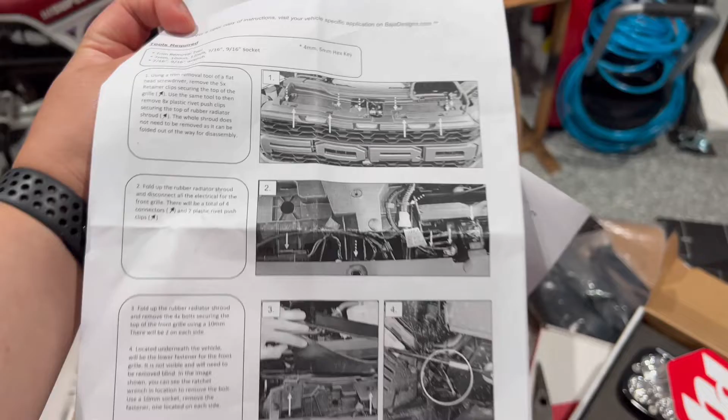Also comes with the brackets that's going to go behind the grill. Should be pretty easy. I did this on my 2020 Raptor, but it was an S8 30-inch light bar behind the grill. So, aside from the paper instructions, which we all kind of never read, right, I am going to have to actually read through this and make sure I'm doing everything correctly.

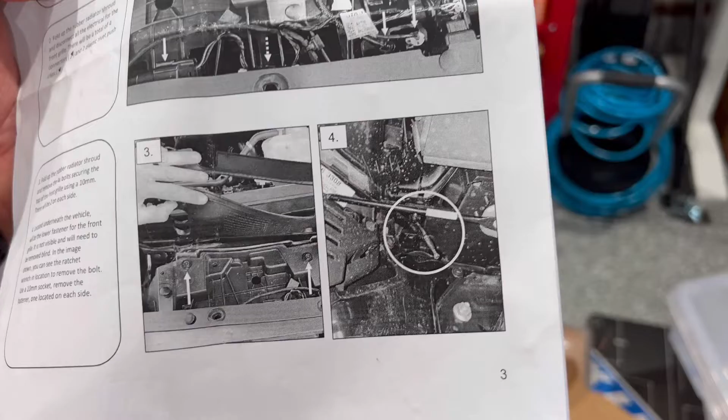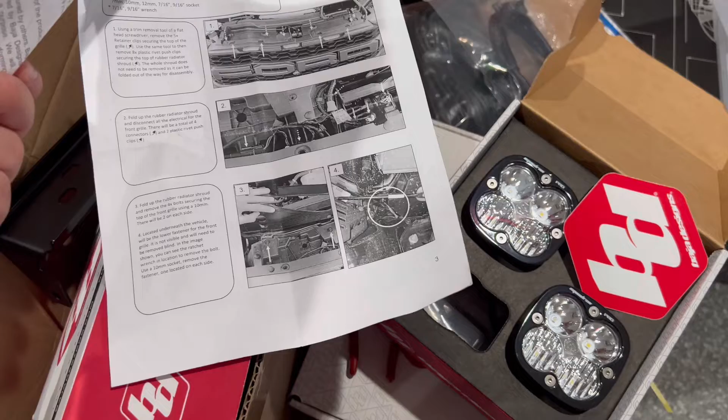As of right now, there is a portion that I couldn't find at all. It's right there, number 4. They're saying there's a bolt that you have to remove blindly, 10 millimeter. I couldn't find it. I put my fingers in there, couldn't figure it out. So I'm gonna try to just go for it and see if I can get the grill off without removing that bolt. Honestly, I don't know if this is maybe a 2021 model. I have a 2022. Maybe they changed it slightly, but I couldn't find that bolt.

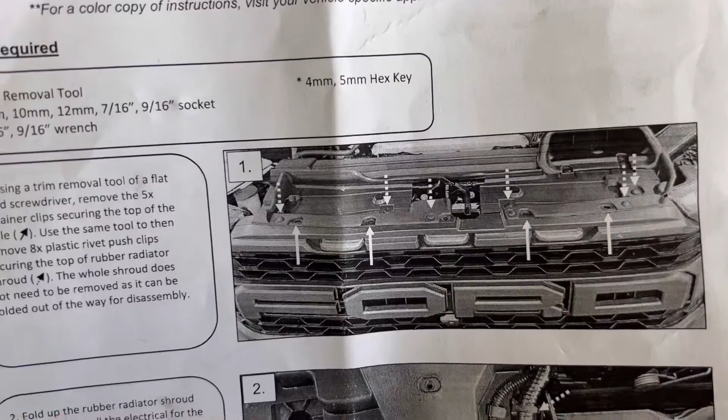But I'll get to it when we get to that portion of the install. So yeah, hopefully it goes down smoothly. These bolts, I'm going to be using this plastic pry tool to get rid of all those clips.

Oh, that one's lost forever.

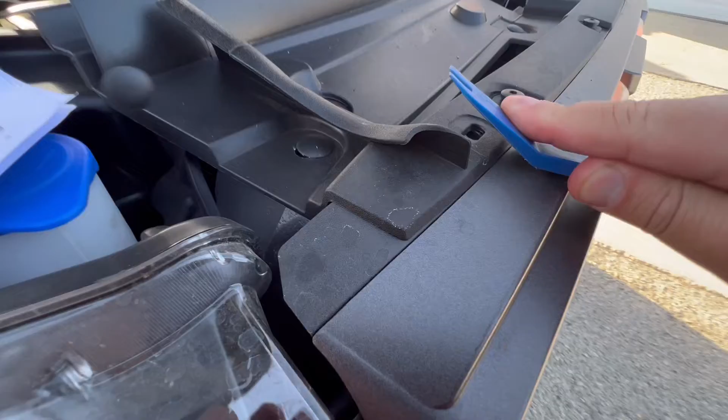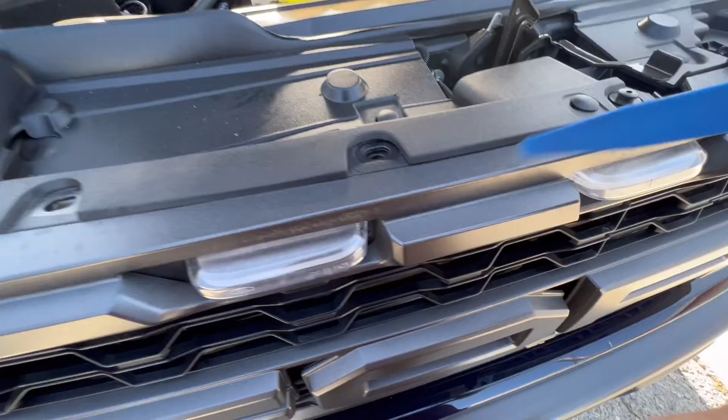So we'll count them: 1, 2, 3, 4, 5, 6, 7, 8, 9, 10, 11, 12, 13, 14, 15, 16.

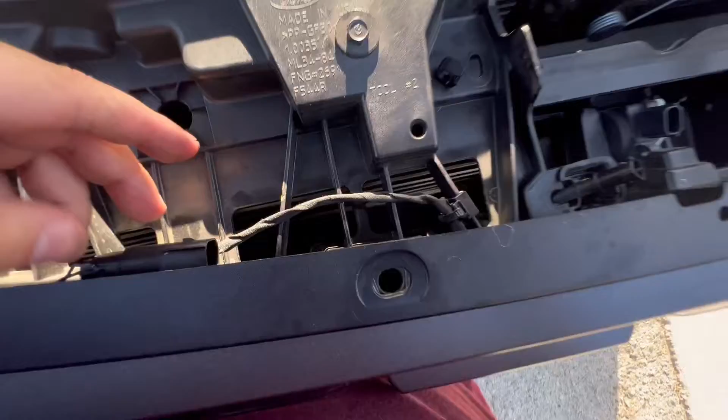All right, so step 2, disconnect electrical for front grill. There will be a total of 4 connectors and 2 plastic rivets. So we got 1, 2, 3, 4. And then disconnect this side.

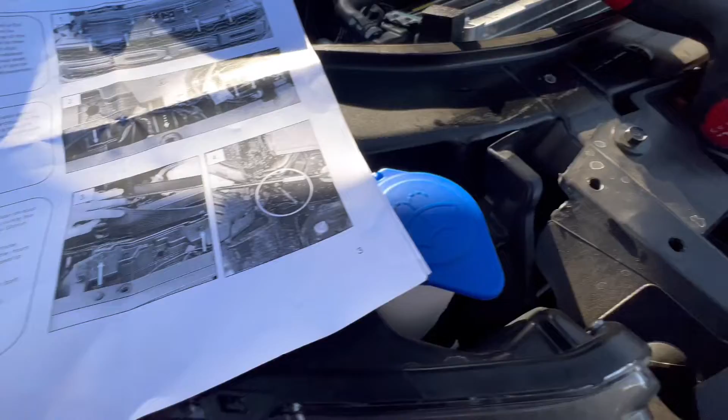All right, so step 3, remove 4 10-millimeter bolts. 1, 2, 3, 4.

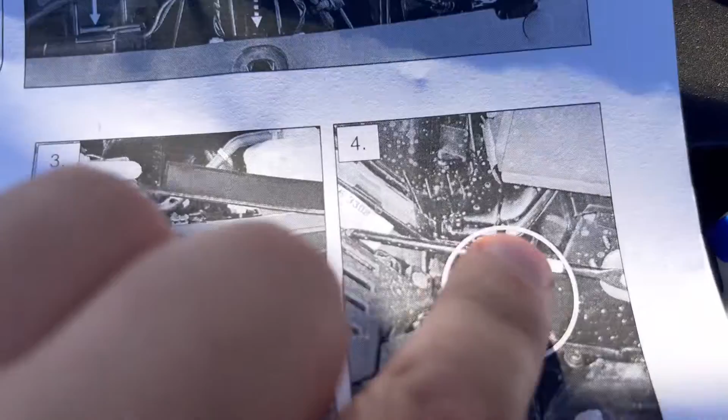All right, so step 4, I could not find these 2 bolts. So I don't know, I'm just gonna move on past step 4. Keep going.

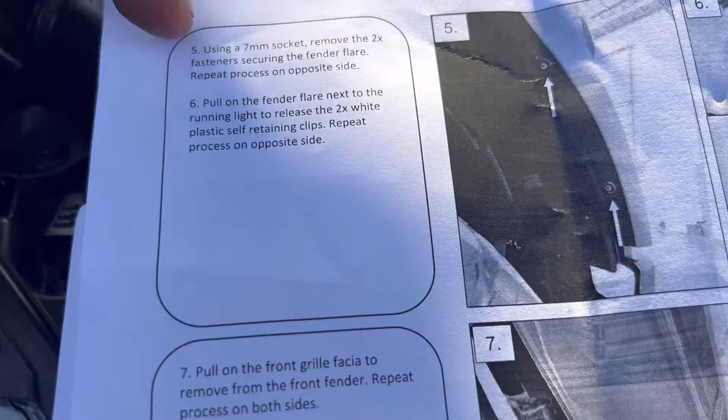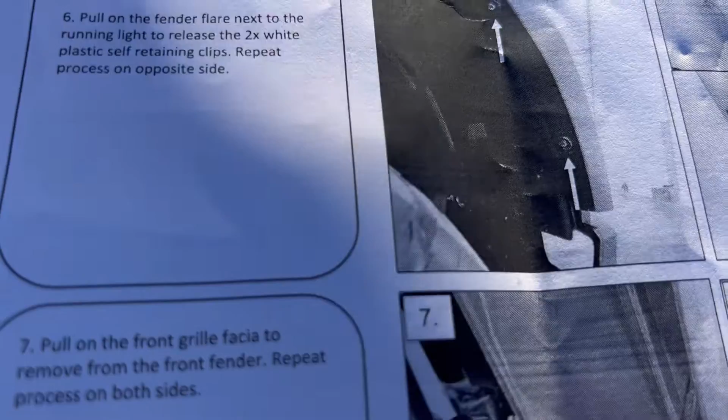So step 5, 7 millimeter, 2 screws on each side, 1, 2. And then we're gonna pull on the fender flare next to the running light to release the 2 white plastic self-retaining clips. Repeat process on the opposite side. So we got 1, 2, not sure how you can see that. 1, 2.

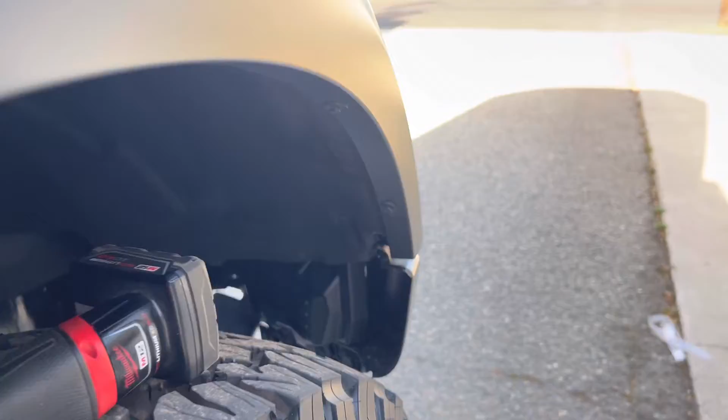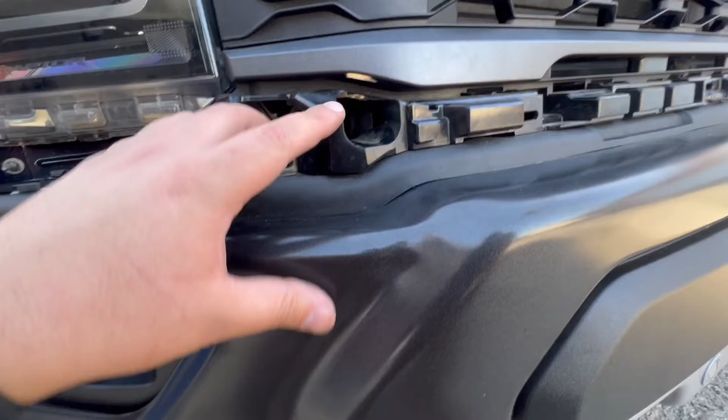Alright, so once you pull this open, you're gonna pull this side. Oh, it's gonna be another 2-hand job. So the instructions didn't mention this, but there's 2 screws, 8 millimeter, one here and one right there that you have to take out in order to take the grill out.

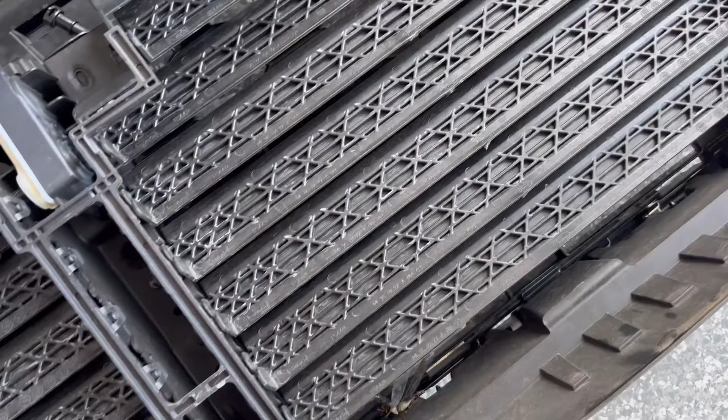All right, so this is another scary process because you're removing 4 of these shutters, but it's pretty easy. You just kind of bend this out of the way.

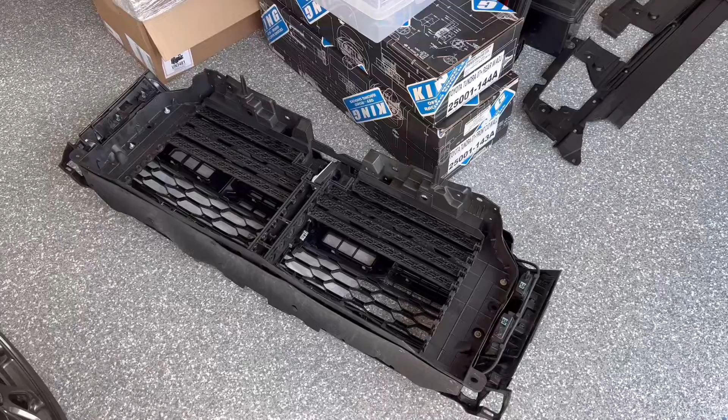All right, so got a bunch of hardware left over. I think they give you extras because all the brackets are on.

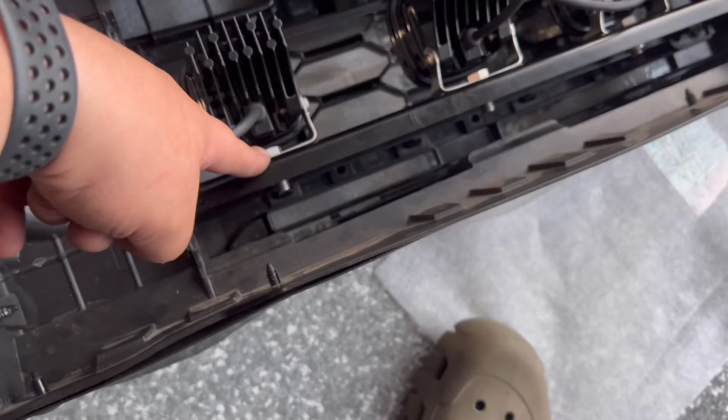This is pretty easy. I mean, it's just throwing the bracket on, and then after I threw the bracket on, I put the lights on, and then after I put the lights on, I brought the bracket over to this, and I put them on these holes here. So you go on the first, on the second and third hole, you remove 4, so 1, 2, 3, 4, you put it on the second and third. Do the same on the other side.

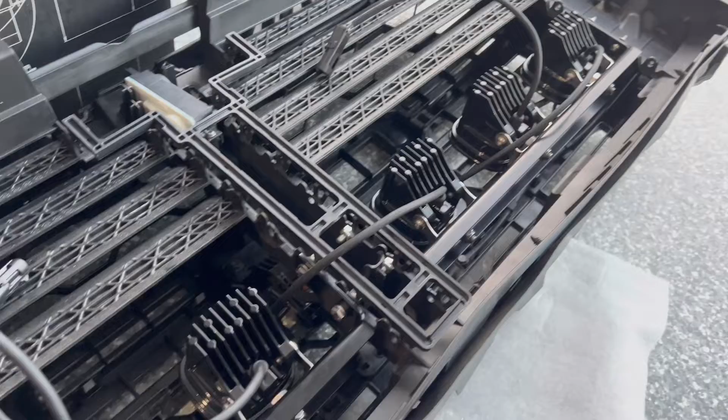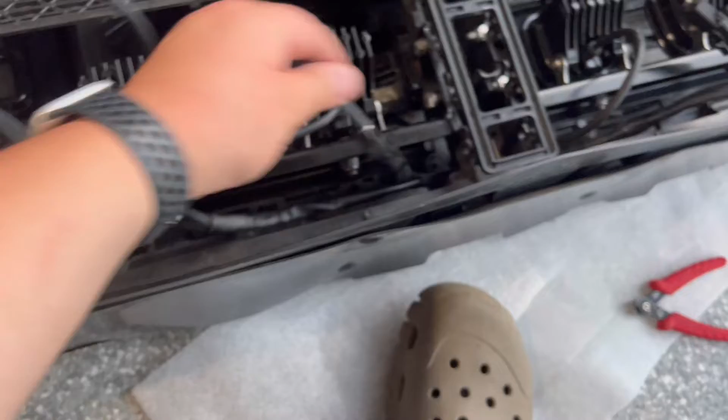And so next, we're gonna throw this harness on, connect all these together. All right, so we got 1, 2, 3. Went underneath, came back out. 4, 5, 6, and the back lead. Right, that's the relay. You got your power, ground.

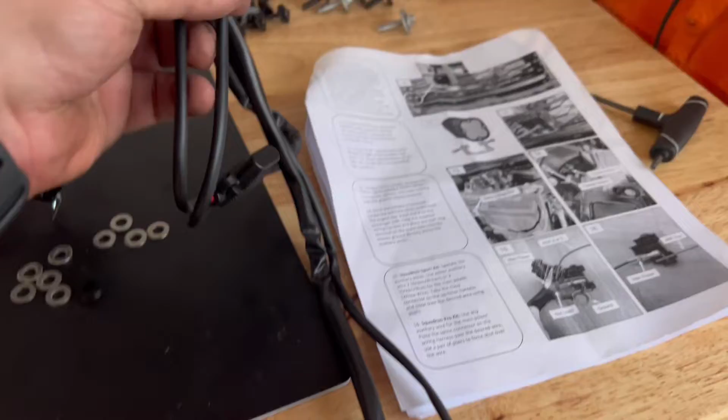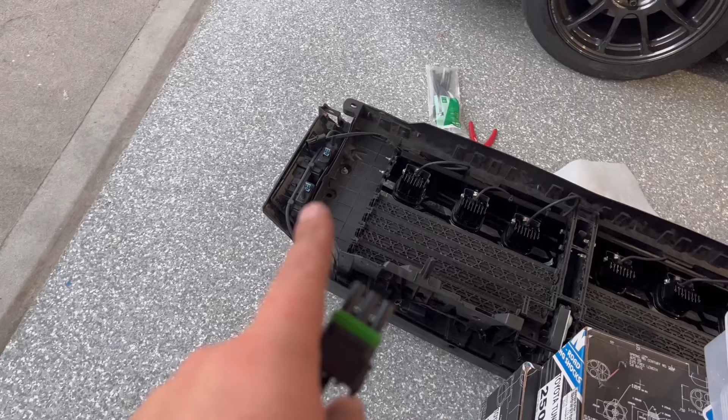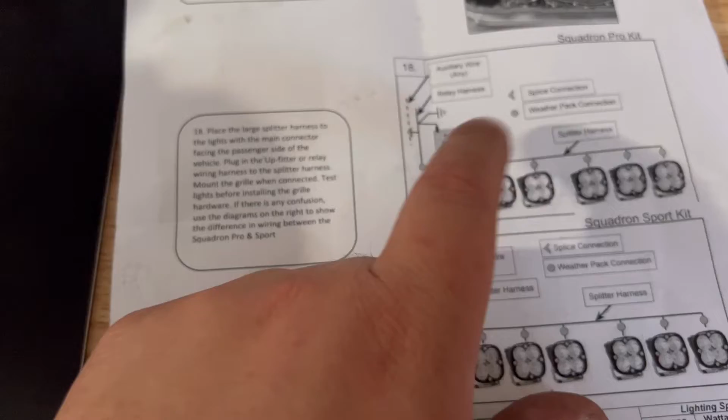This is the one that goes to the auxiliary cable, which goes up to the upfitter switches, and then this one will go to that end right there. So this was the other harness that it came with. I don't know what this is for, to be honest. I just need the other one with the relay because we're running the Pro kit, so we definitely need that relay. Sport kit goes directly into the battery with the fuse, no relay needed, but we need that relay for the Pros because they draw a lot of amps.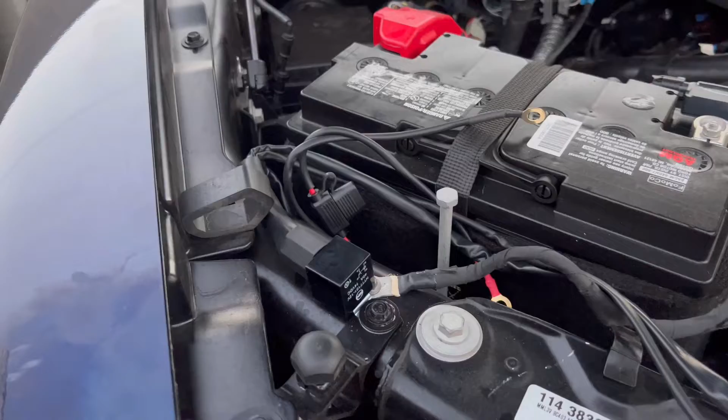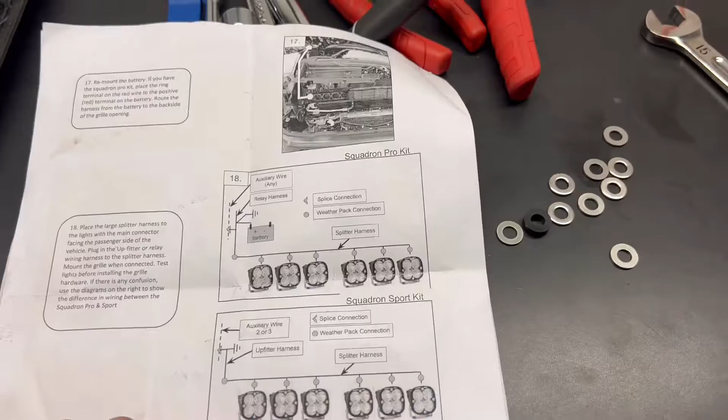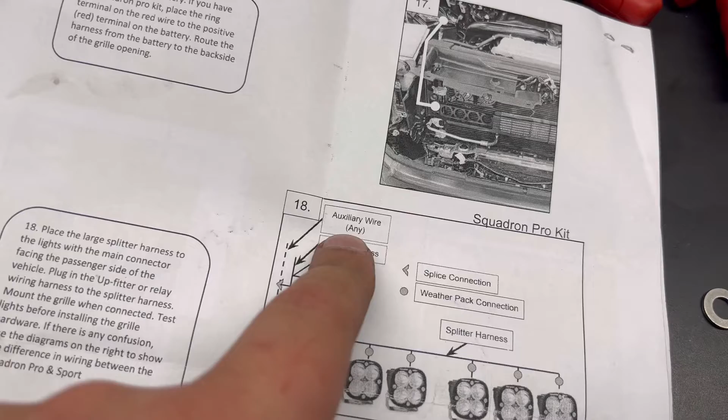Alright, so it's getting dark. I'm having trouble finding the auxiliary wire because of my color vision. I can't find which one's a violet green wire, so I'm asking someone to help me distinguish which wire that is. And I'm pretty much done. I just gotta connect this auxiliary wire and then connect the cable to the lights and then put everything back together and it should work.

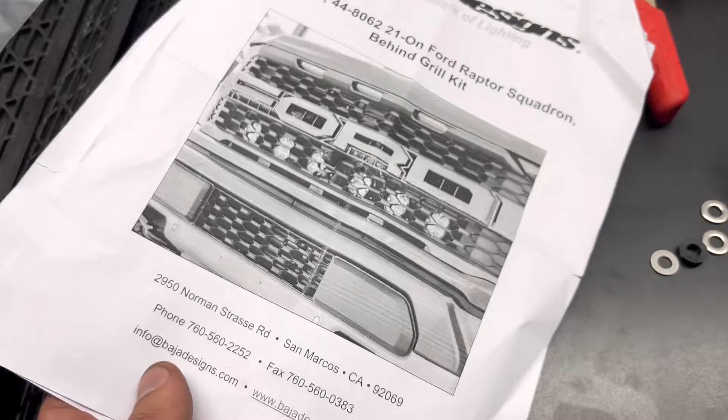So it's already dark. So it's my first time doing it with nothing but these instructions, which are somewhat different. They did a good job, but there's still a lot of things missing that I wish I knew from the beginning, which would have made this a little bit faster.

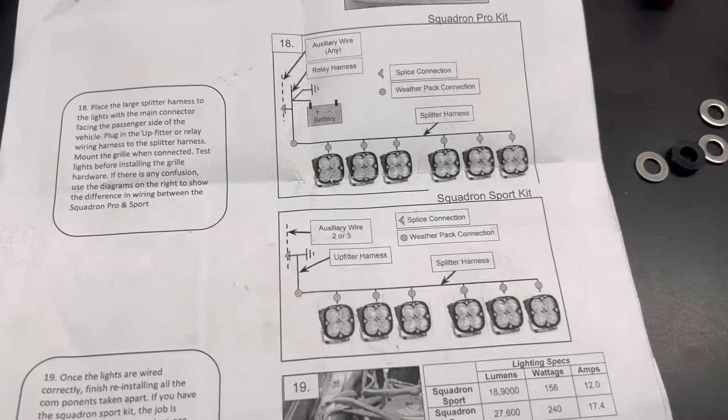So I used a spacer here because this bolt won't go all the way through because of this. So you need to put a spacer there and then a spacer on this side, on the outer sides. Spacer here. If not, that bolt will hit this.

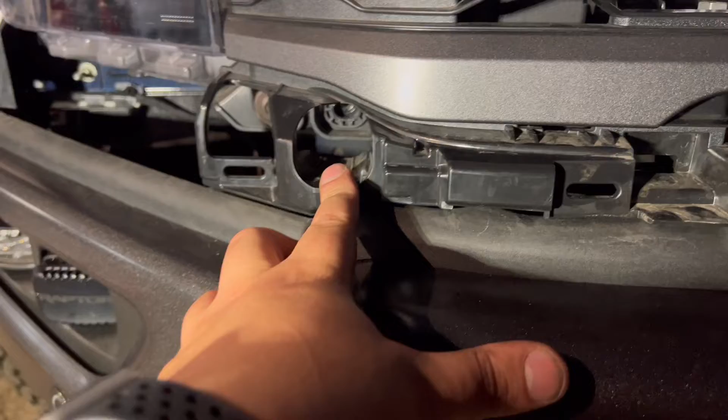Alright, so I'm gonna put everything back together. Remember those 2 screws that weren't in the instructions, but ended up finding out when I was trying to take the grill off. Just go ahead and reverse everything, put everything back together.